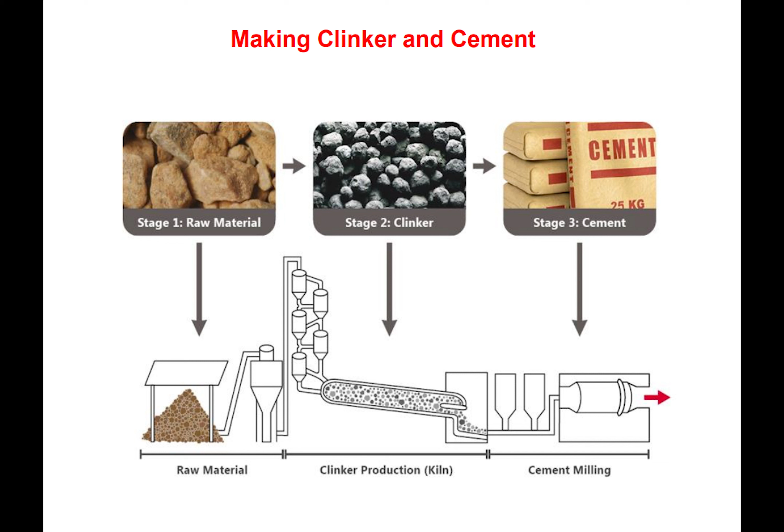We've put in our limestone, our clay and our sand, and we now need to heat the oven. Instead of turning it up to 180 degrees for our cake, we need to bring it up to 1450 degrees Celsius. This is so hot that the limestone will actually melt into a liquid.

You can see that big long sausage. I always like to relate to things - it's just like a toilet roll. And you'll see at the end of it, there's something which I won't comment on, but that is the actual flame. The flame needs to be heated using either coal or gas, or, as we'll talk through our presentation today, there are a range of alternative fuels that can also be used to decarbonise our energy usage.

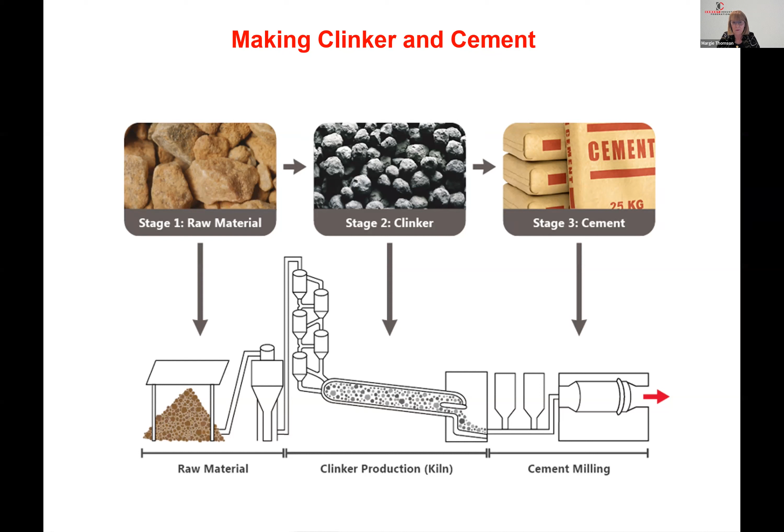So what pops out the end after it's gone through the long sausage, the kiln, is clinker. And it's clinker which is high in CO2 once you get into embodied carbon, but we'll come into that again later. From that, you get these little stones of clinker, and they need to then be crushed with gypsum and other products. You might add some more limestone that hasn't been burnt. Then you end up with the cement that you would go and buy at Bunnings.

So where are our integrated cement plant locations? These are plants that actually produce both the clinker and the cement in an integrated process. There's only 5 in Australia. There are over 3,500 in the world. So we have 5, of which 4 are significant in terms of volume. As you can see, they are always placed either near a limestone deposit, seeing that is the key ingredient, or they'll be close to port or near a capital city, which is why you'll see why they are located where they are.

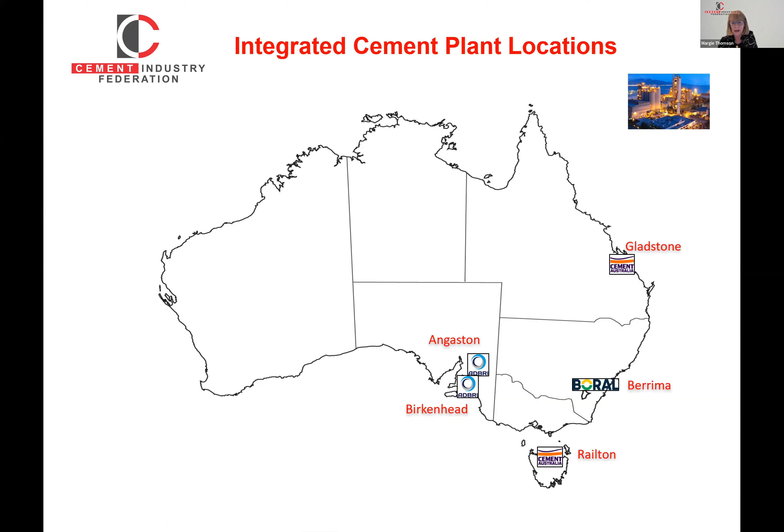So Australian production - the first figure at the top is clinker production, and you can see that we produce around 5.18 million tonnes of clinker, and that's a very tiny amount compared to the world. Nearly between 60 and 70% of clinker or cement is produced in China. So we're a very small player, but that doesn't mean it's not important for us to decarbonise.

As you can see, clinker imports have grown significantly over time. Our production from our manufacturing sector in Australia has remained virtually unchanged, but as the population grows, so does the demand for our product. That extra demand has actually been fulfilled through imports instead of putting down further kilns. And as you can see in the bottom graphic, we rarely saw cement imports, but even cement is being imported in more significant volumes.

It's a lot more difficult to ship cement - as you know, if it touches water, it can solidify. So the majority of clinker trade around the world is actually in terms of clinker. And we have quite a unique profile. Apart from a number of small countries, including New Zealand, you'll rarely see such a large number of clinker imports. It's usually all produced domestically because of the cost.

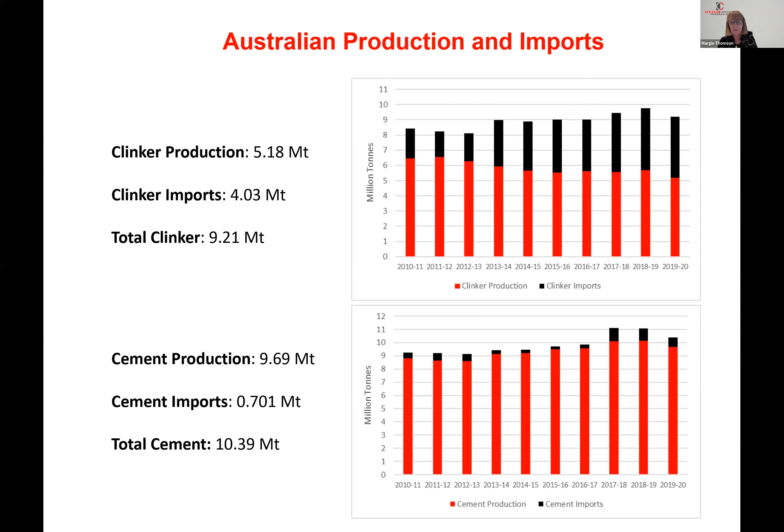So what is the emissions profile of cement? Our total emissions are just under 5 million tonnes. That's just around 1% of our total Australian inventory. We've made significant inroads over the last 20 years. We have actually reduced our total emissions by over 20% over the last 10 years. And as you can see, the emissions intensity factor has actually declined.

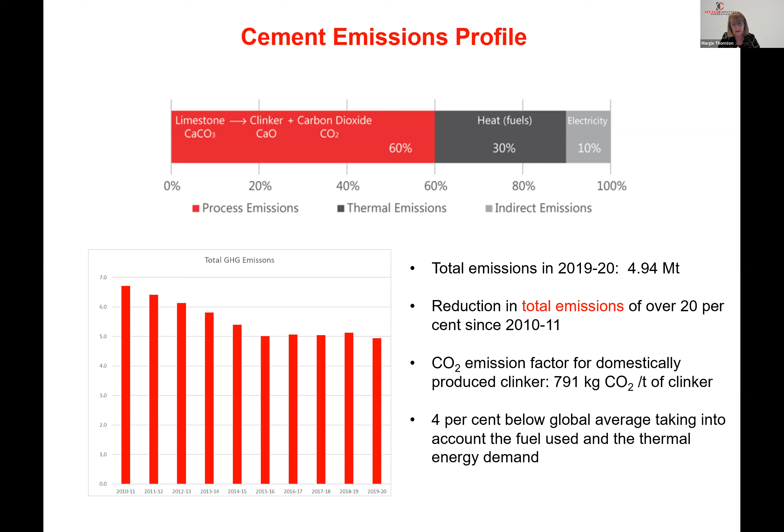But when you actually put cement into concrete, remember it is the binder that sticks the various aggregates together. Only 12% of the actual concrete is made up of cement. Then you can see that there are what's called SCMs, which are supplementary cementitious materials, which we'll talk to in a moment. As you can see, there are significant aggregates and then water that are added to the cement to make concrete.

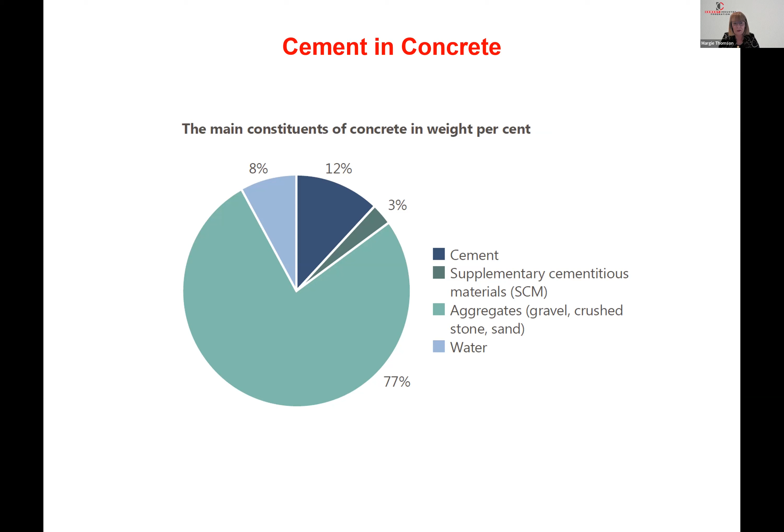So as you can see, when we get to the emissions profile for cement and concrete, it doesn't really change that much from when we were looking at cement, apart from there's a further use in terms of electricity and a small amount of transport. Where our profile differs to other building materials is that over 55% of our emissions originate from that burning of the limestone, the calcination of limestone. So when it turns into the liquid, it actually releases CO2.

26%, or about a quarter of our emissions, actually come from heating the kiln, so heating the toilet roll. So when we are looking at heating the kiln, we are really keen to look at how we can decarbonise by using alternative fuels.

12% are indirect emissions related to electricity usage, and about 7% from the transport of cement and concrete.

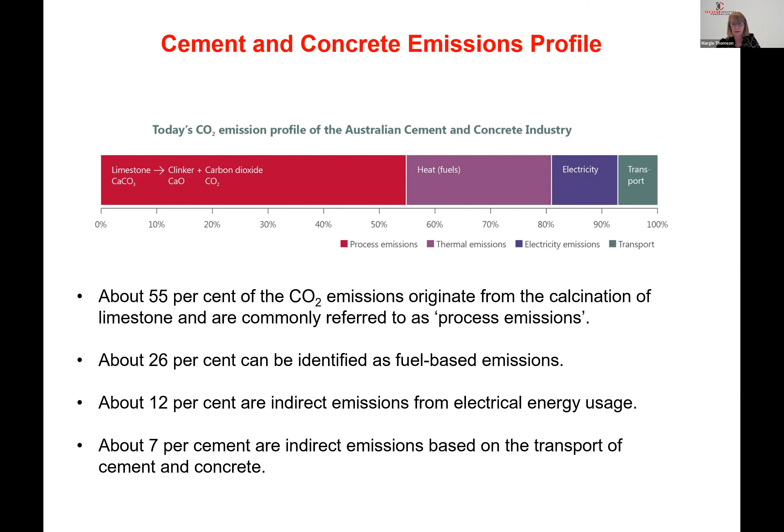Next slide. If you look at the cement and concrete value chain, historically there's been this real focus on the actual manufacturing facility. But if you look along the value chain, we can see that the opportunity to decarbonise increases as we join hands across that value chain in our quest to reduce emissions to net zero by 2050.

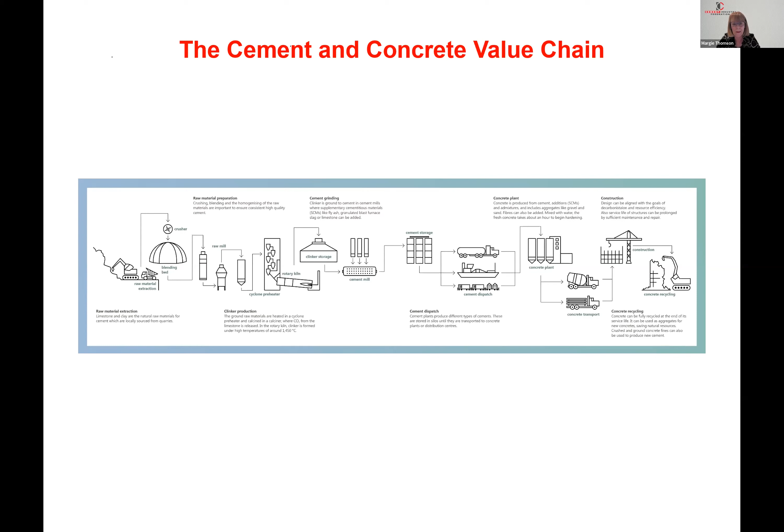Next slide. I went to a seminar in early 2020. We have always relied on a roadmap by the World Business Council, and there was this fantastic presentation around a whole life perspective, demonstrating where embodied carbon comes into play and then whole of life. From that, we realised that we needed to do a domestic pathways report so that we could look at that full value chain and try to bring all the various partners together in our quest to decarbonise.

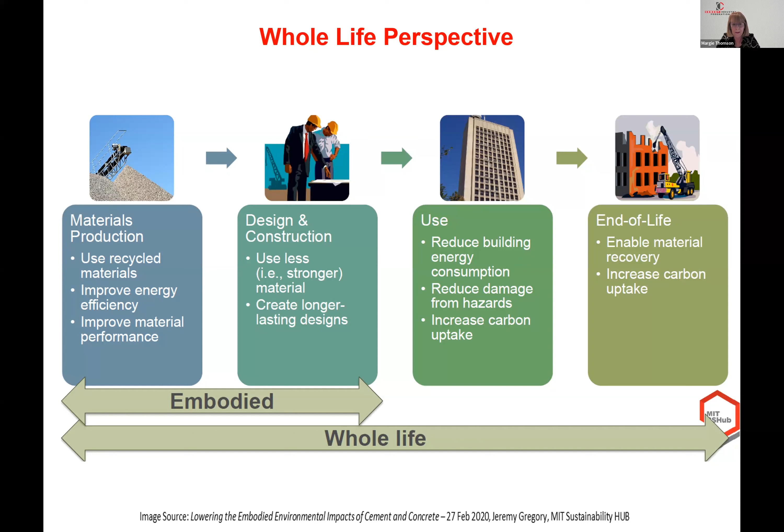Next slide. Thank you. And so we did this in a hurry.

We went looking for some partners to try to ensure that we could inform, one, the second LETS statement, the low emissions technology statement that's released by the federal government on an annual basis, but also to have something, a go-to document, which all across the value chain could be enabled to go to a single document that would provide an overview of what our emissions profile looks like in Australia, and then also look at what are the pathways that we need to harness to reduce our emissions by 2050.

So this report was done independently. We chose a consultant called VDZ, which is a German affiliate, which also was building a roadmap or a pathways document for the Global Cement and Concrete Association.

From that, I'd like to acknowledge the key sponsors who have put in enormous time as well as money in ensuring that this project actually was released well before its due date, which is only a few months ago, but it seems a long time ago. There's been so much interest in this report.

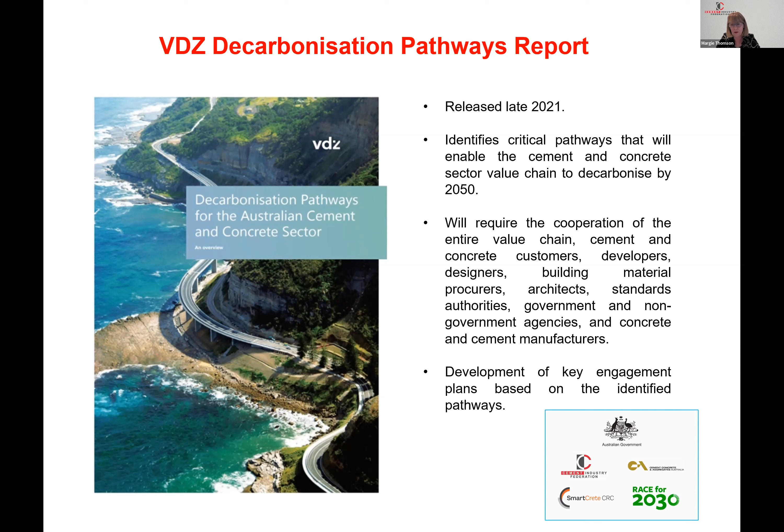A special shout out, of course, to our sister organisation, Cement, Concrete and Aggregates Australia, which has played a key role in the development of the report, as well as in its implementation as we develop our engagement plans. And also to the CRCs of Smartcrete and Race for 2030, who provided substantial funding to the project as well.

So this is the VDZ Decarbonisation Pathways report on a slide. There's some really important information that you need to look at in looking at how the build actually happened. I just want to get to my notes.

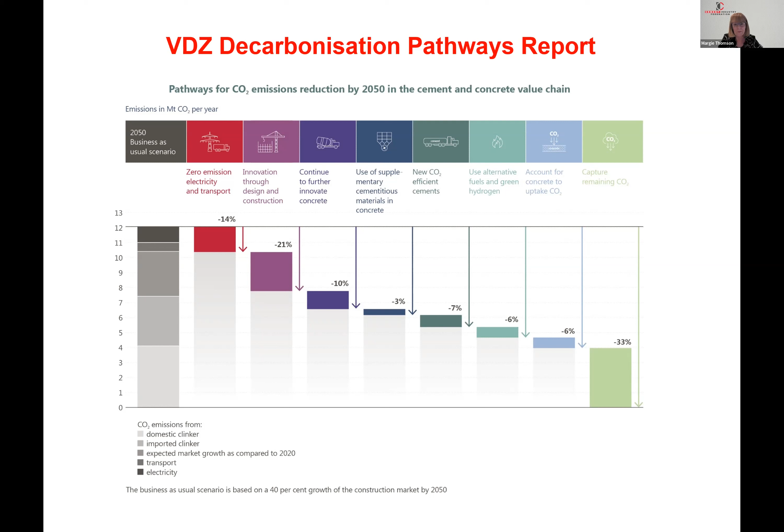So the first one is zero emissions electricity and transport, which is assumed in the actual modelling. And to do that means that even though electricity and transport is a relatively minor part of our emissions profile, it's a very important one. So looking through the usage of green electricity and then looking at how we can green our transport. Transport's really important for this sector.

We have some of the largest trucking fleets. We use coastal shipping and international shipping, and we also use rail. It's really interesting, I'm just seeing the number of EV trucks and agitators, which are the roundy things that take the concrete to the actual site. They're still in that pilot stage, but they're starting to come on board. So we can see that it is going to happen.

It will take time, it will take investment, and that will be the real challenge in moving from our traditional fleets over to those newer EV fleets, or maybe hydrogen based.

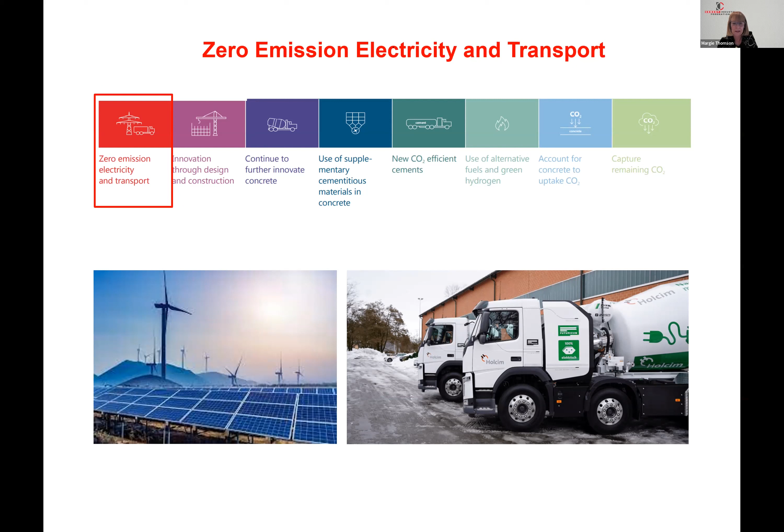Another important pathway is alternative fuels and green hydrogen. Traditionally, say 10 years ago, we were using about 10% alternative fuels. Now alternative fuels may be refined demolition waste, so waste that would have gone to landfill can be used as an energy source and join that circular economy. There are many other products that can be used as waste energy, anything from tyres to solvents to spent liners from the aluminium sector that can really make a difference. We've got to the stage where it's just under 20% alternative fuels at the moment.

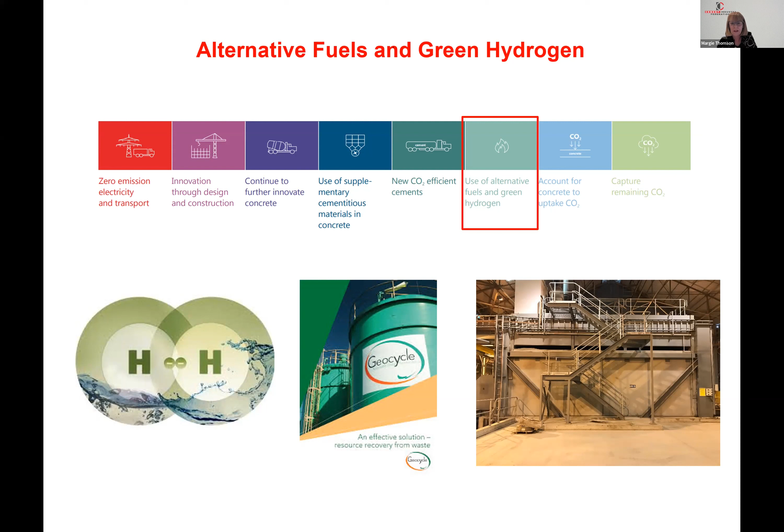We know that in other countries they've got up to as high as 70%. We also know that hydrogen is coming on as a potential play as well. At the moment, based on existing technologies, because we need to get up to 1450 degrees, not 800 or 1000 degrees as in other sectors, it becomes a little more challenging for us. The VDZ report estimates we'll use around 10 to 15% green hydrogen, but that could change. I just read an article last night where they're piloting, just a very small pilot, actually using green electricity to heat the kiln. If somebody asked that a year ago, the question would have been that's not possible, or it'd be very difficult to do. So times are changing quickly. There's a lot of R&D out there, and we need to make sure we're part of it, and that's our real opportunity.

New CO2 efficient cements are also really important. I know Stephen Foster will speak to this in a lot more detail, so I won't now, but lower clinker content in cement obviously leads to lower CO2 emissions. Clinker in cement can be replaced by SCMs, such as fly ash, which is a waste product from the power sector, and slag, which is a byproduct from the steel industry. There are many other types of SCMs that can also be used. You can use a higher allocation of limestone, and many countries are doing that to lower their clinker content in cement.

There are new composite cements being produced too. An example is cements based around clay that don't need to be heated to the same extent and don't have the same emissions profile. Alternative binders are also available. The key challenge, which we see as an opportunity, is making sure we go through the standards and specifications required to support decarbonising cement. Our regulatory environment needs to stay up to date with what's happening internationally. We play a key role right across the value chain in making sure we can trial and use some of these lower carbon cements in our building and construction.

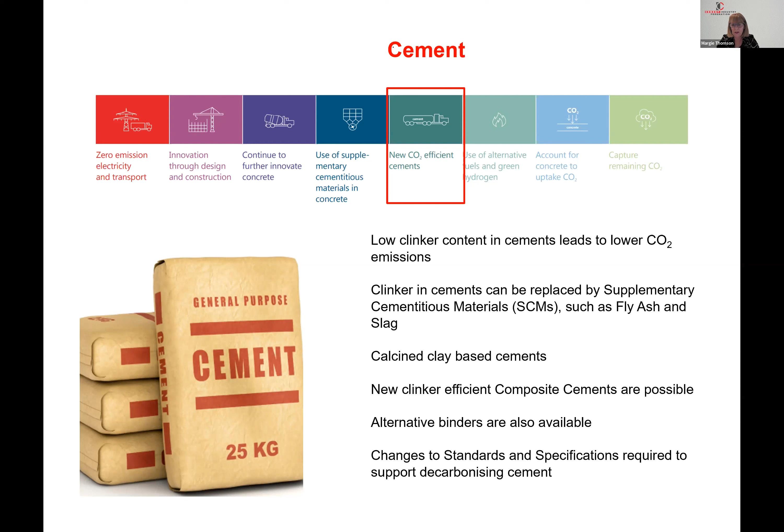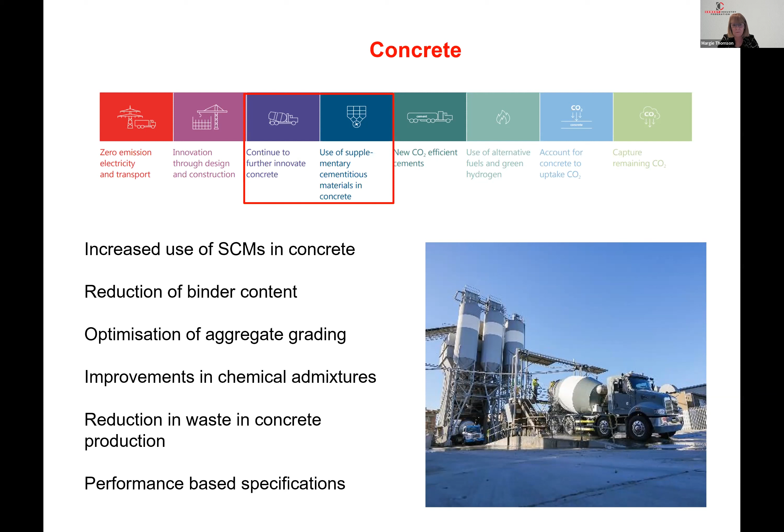Again, we need to ensure we're moving towards performance-based specifications, so we're moving away from looking at ingredients to make a product, toward what will create the best type of concrete for that particular build, taking into account the cost, the reliability, and being a decarbonised product in terms of embodied carbon.

So now we're starting to move further and further away from the manufacturing facility. That shows us that if we can join hands and really work across the value chain, we can make a really huge difference in decarbonising the built environment. Concrete, being such a core component of most builds, plays a core role in what can be done. I can't go into a lot of detail today because we won't have a lot of time, but it's really important to have a look at the VDZ report.

Structural optimization, providing the opportunity to use less concrete for the same load-bearing capacity, improving the design assumptions and methods, the age of concrete for strength assessment, improved construction technologies - for example, reducing the need for pumping and shifting from cast on site to precast can reduce binder content.

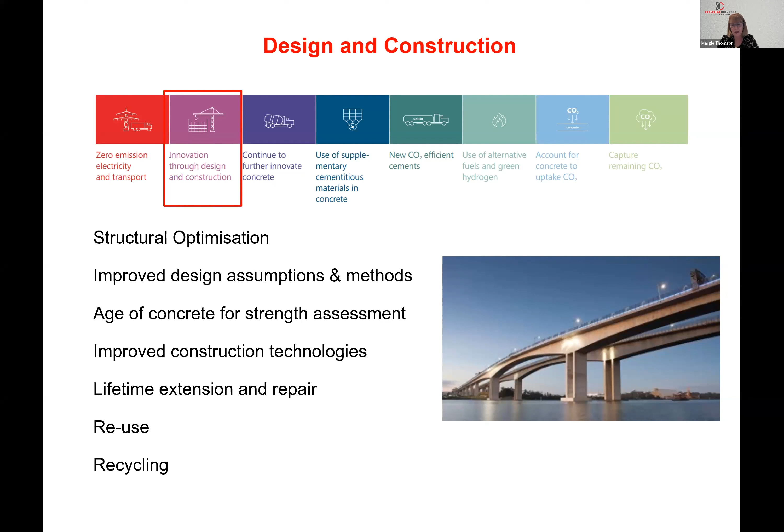Those involved in the sector realise that recarbonation has actually been treated as a challenge. It can also be an opportunity. So like a tree, concrete, if it's exposed, actually recarbonates and brings back that CO2. Those process emissions that were originally released during the manufacturing process can be compensated for. Last year in the IPCC working draft report, they noted for the first time that concrete absorbs CO2 emissions. In the VDZ report, they've put a very conservative estimate of about 20%, but it can be higher.

We have a project that we are developing with Smartcrete at the moment to look at what methods need to be developed so that Australia, along with other countries doing the same project, can take that to IPCC. That would mean that our national inventory for cement and concrete would be reduced under each of those individual country NDCs.

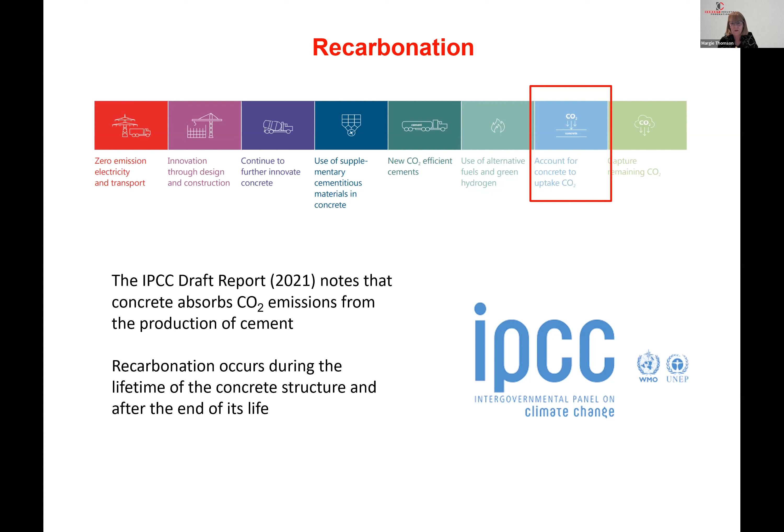We're also very blessed that there are some core technologies that have been produced by Australia, and the potential for those technologies to be trialled at site is something that will happen soon.

We need to really look at not just the technologies, we need to look at transport, which can be by pipeline or it may be by shipping. Of course, there's significant capital investment in terms of using pipelines compared to shipping, but shipping is a more expensive option. We need to look at where the kilns are located, and where the sink sites are, or whether they're close to market so we can actually use the CO2 for other purposes.

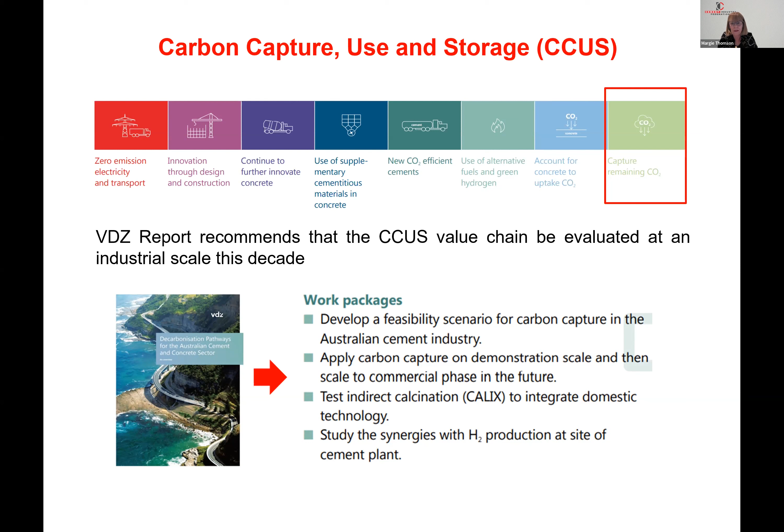So it's not something we expect to happen in the next 10 years, but it is something that is definitely critical unless other technologies can come into play, which is always possible.

So going back to the VDZ report, there are recommendations on what are the key innovation areas that should be prioritised. Everybody should go through that list individually. We've got 181 participants I can see down on the screen. It's really worthwhile at this stage to actually put a tick of where your interest lies.

As the engagement plans are being developed with the value chain, CCA will play a key role in this because a lot of this is post the cement manufacturing stage. The opportunity is to bring the various parts of the value chain together to see how we can make a difference.

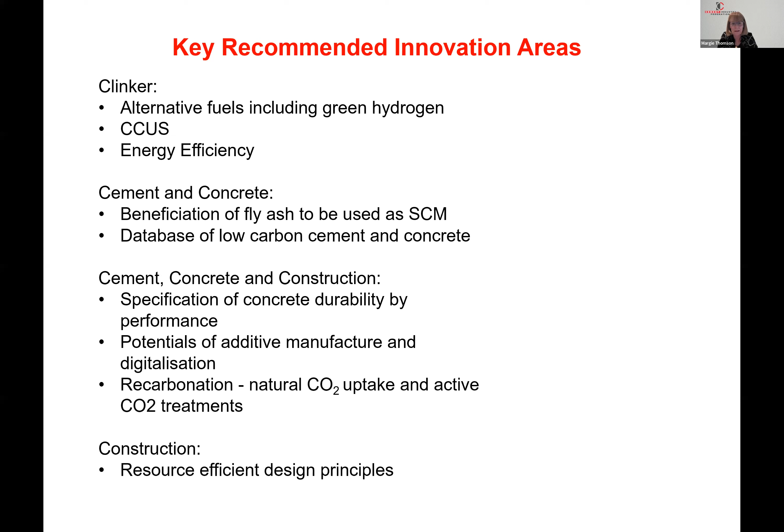So that's our next steps. VDZ has provided this pathways report - it's only just the beginning. We have made significant inroads to date, and I think that always needs to be recognised, but there's a lot more to be done. We are labelled as a difficult to abate sector, and you can see why when you look at what our process emissions profile looks like, but that doesn't mean we can't decarbonise.

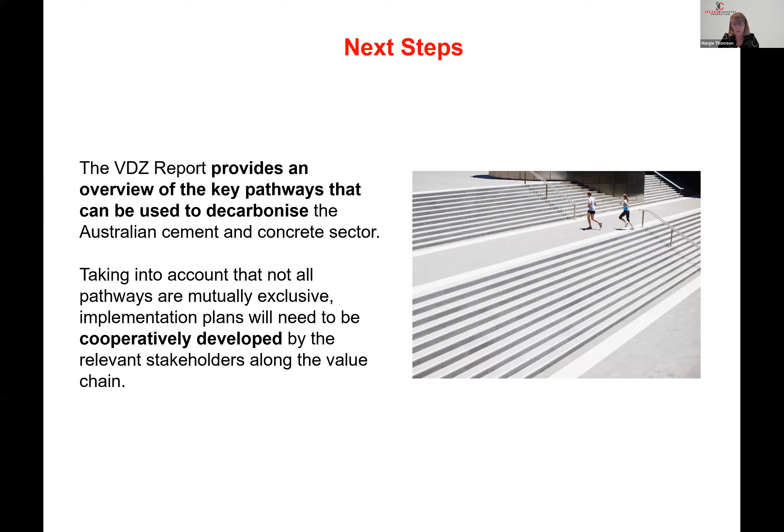It means that significant investment will need to be made, it will be lumpy, and the role of all the various parts of the supply chain or value chain are required, along with government, regulation and specifications along the journey. But we're confident that we will be able to decarbonise by 2050.